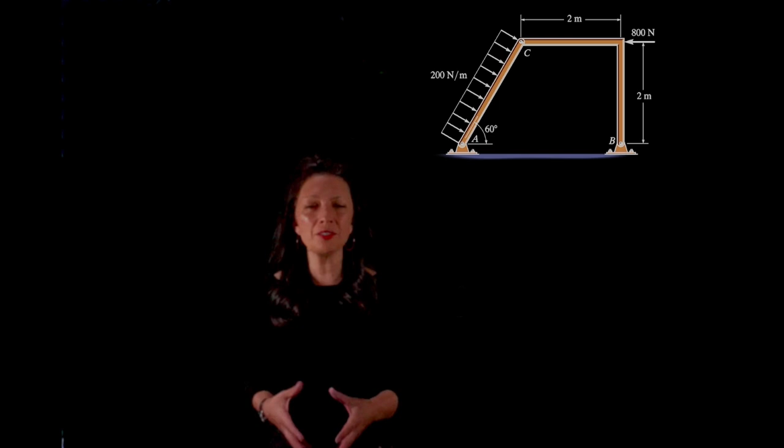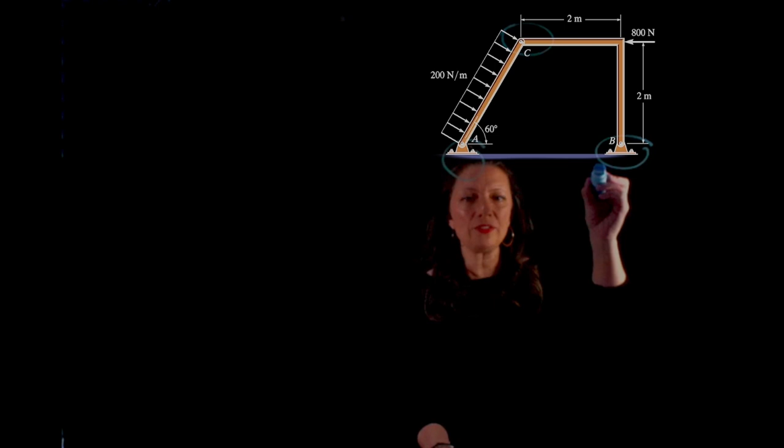And in this question, it actually asks us to determine the force in the pins A, B and C. Okay, so we know that we're going to have X and Y components for each of these. So how do I solve this? I have quite a few unknowns, so if I take a section through this pin, I'm going to end up having member AC, and I'll also have member CB. So I'm going to split this up into two separate problems.

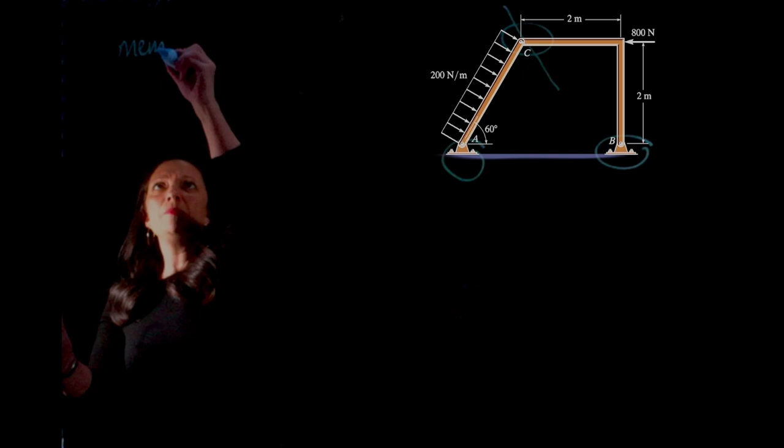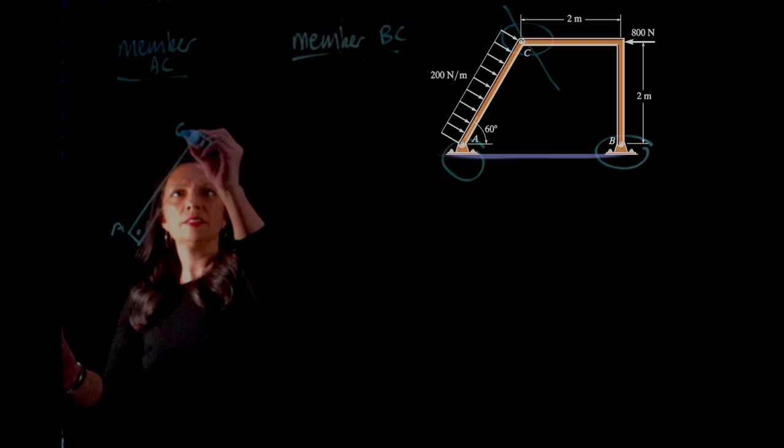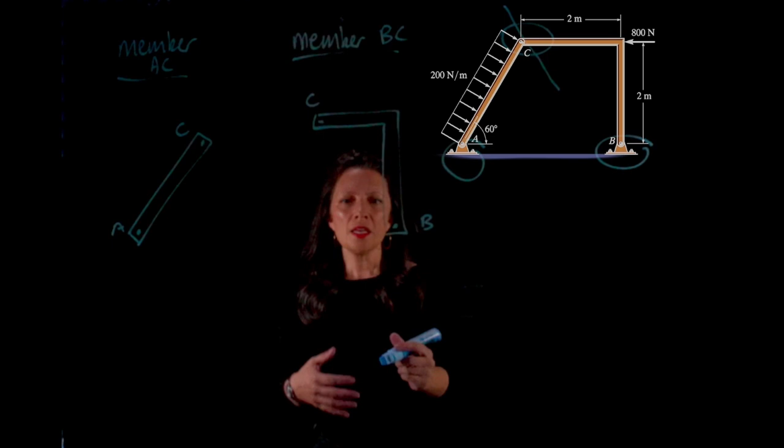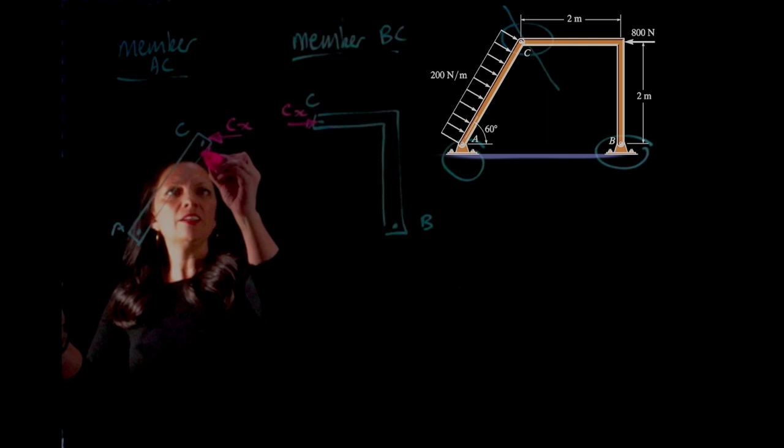So let's take a look here at member AC and member BC. In this one here we have A and C, and over here we have B and C. So when we break the frame into two parts, we need to make sure that everything stays in equilibrium, and these forces are going to be equal and opposite. So here I'm going to have a Cx, which means on this side I'm going to have an equal and opposite Cx, and here I'll have a Cy, and on the other side I'll also have a Cy.

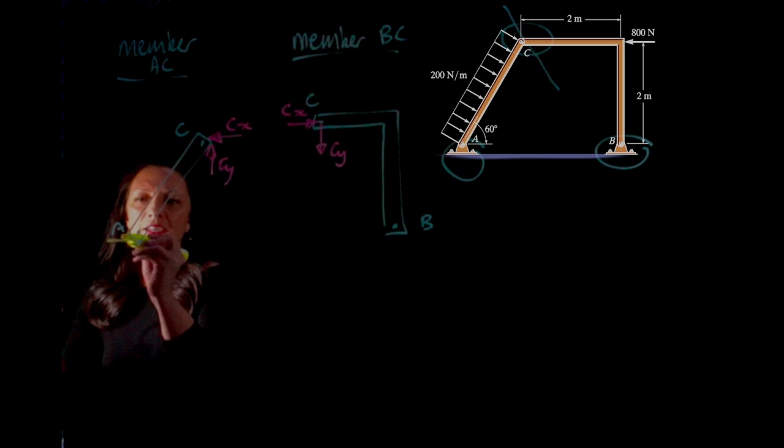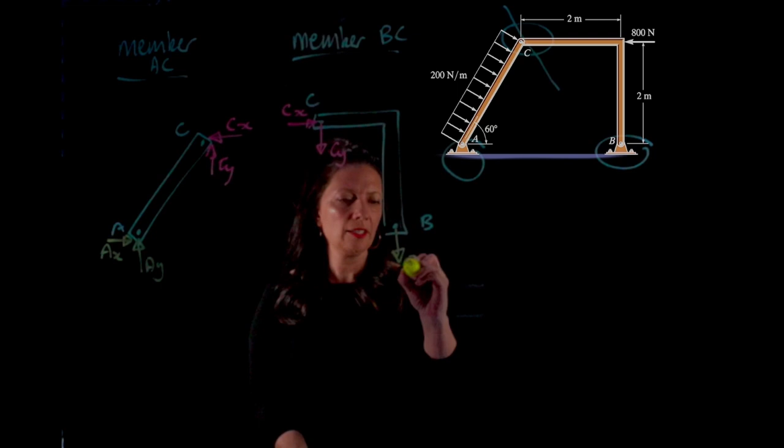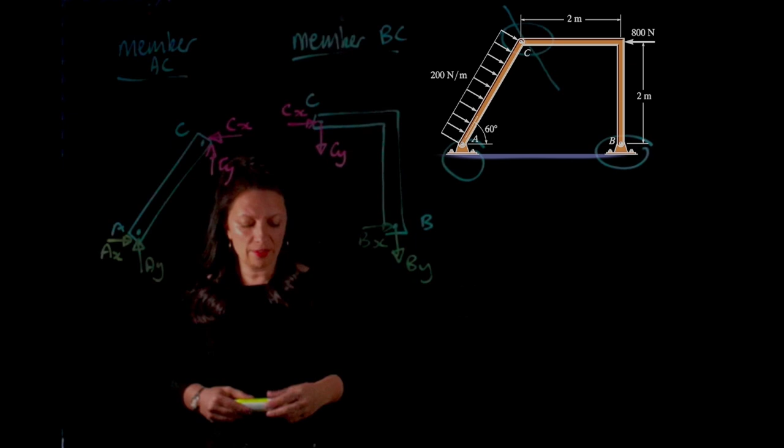Okay, so now what do we need to find? We also have reaction forces at A. So at A I have an Ax and an Ay, and over at B I have a By and a Bx. Okay, let's put on our other forces. So here we have 800 newtons,

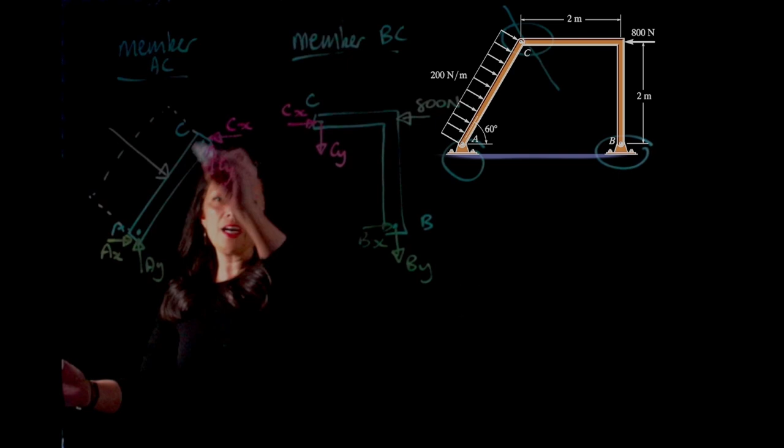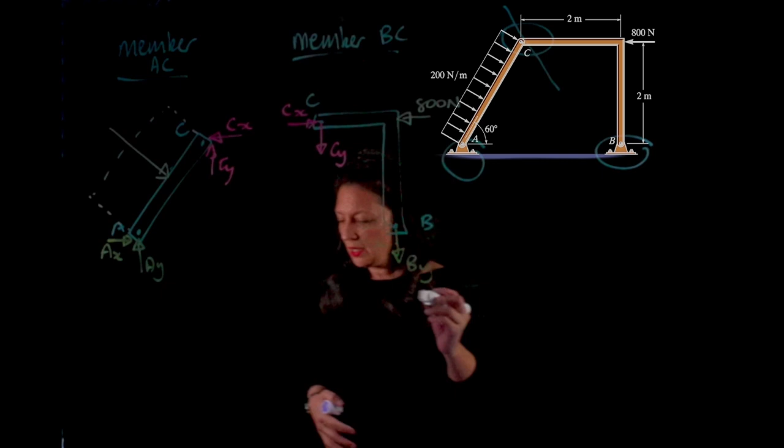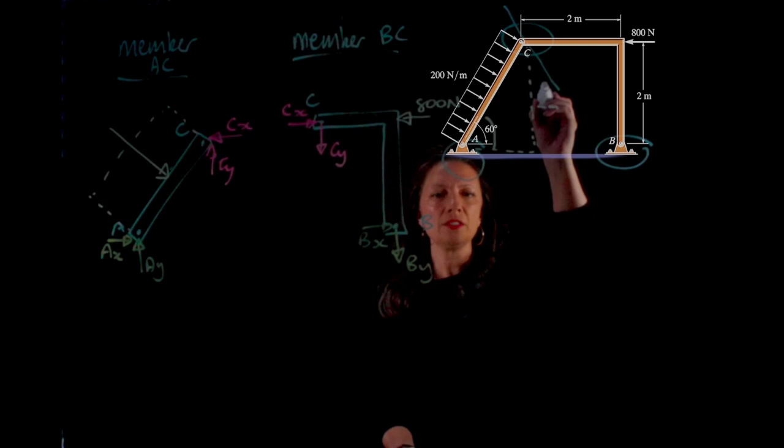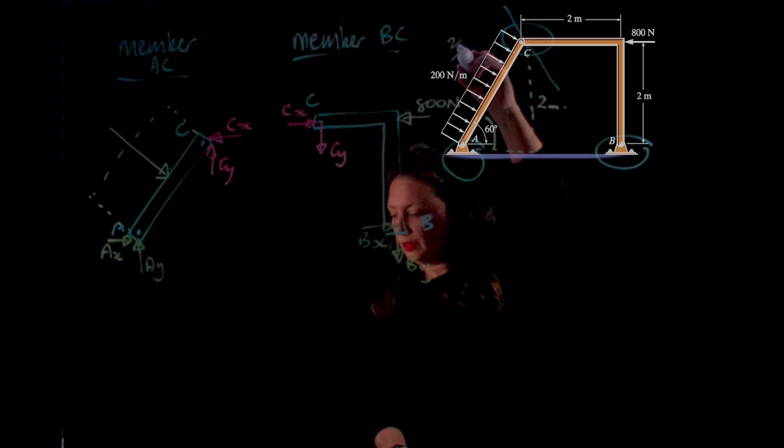and we need to convert this distributed load into a concentrated force. So it's going to be perpendicular, and it's going to sit halfway along this member. So we need to actually calculate what this concentrated force is, and to do that we actually need to get some geometry. So if I just look over here, this is my height of 2 meters. If that's 60 degrees, then this length is going to be opposite on hypotenuse. So it's going to be 2 on sine 60, actually.

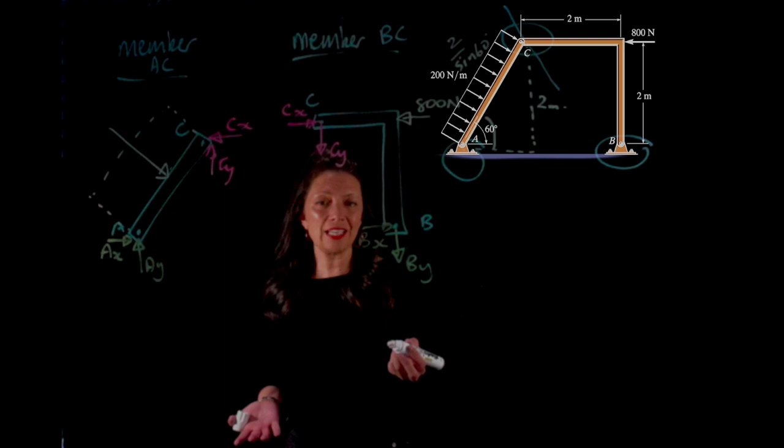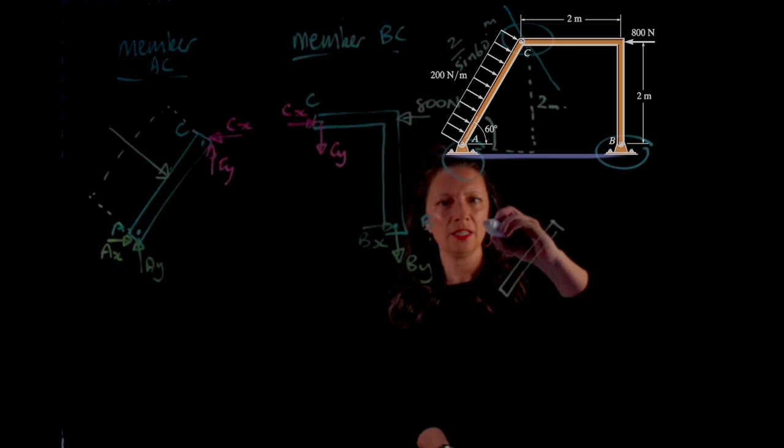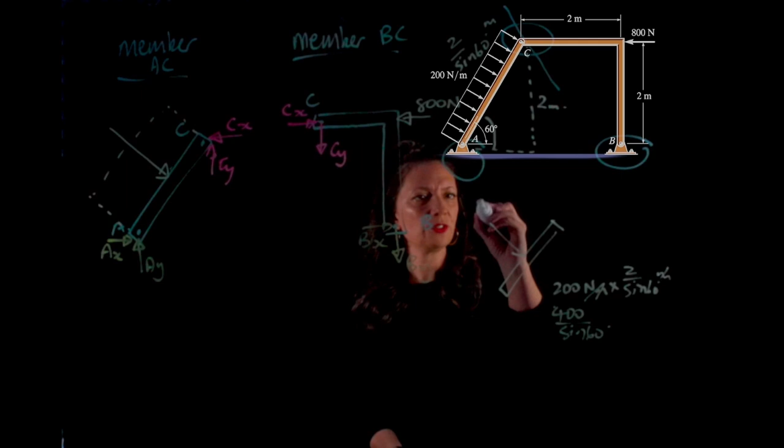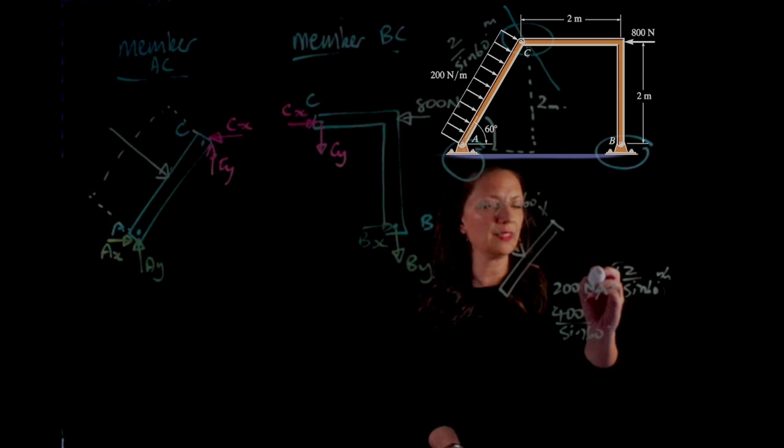So now we can actually calculate what that force is going to be. So if that's in meters, here I have the member, and it's going to be 200 newtons per meter times 2 on sine 60 meters. The meters will cancel out and I'm left with newtons. So it's going to be 400 on sine 60, and that sits halfway through. So if the whole length is 2 on sine 60, that means this distance here is going to be 1 on sine 60. You can actually calculate that out if you like.

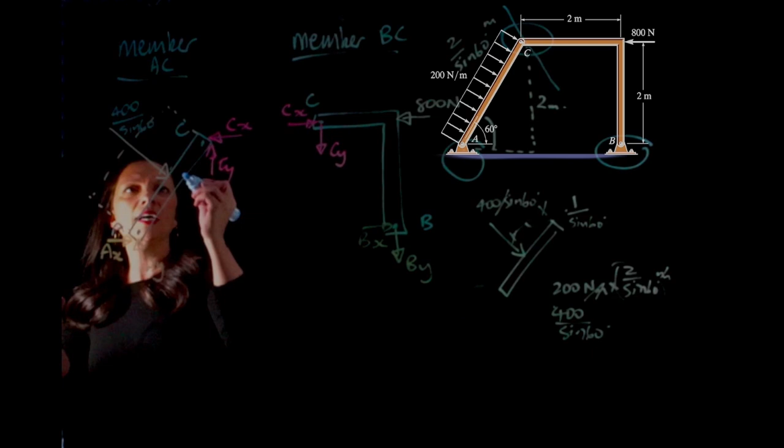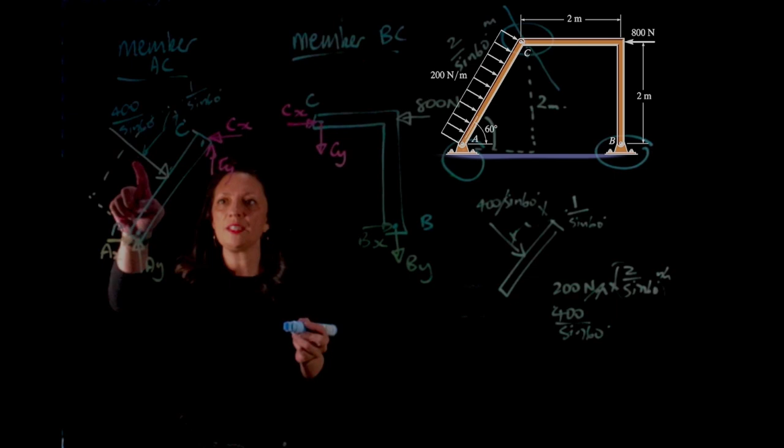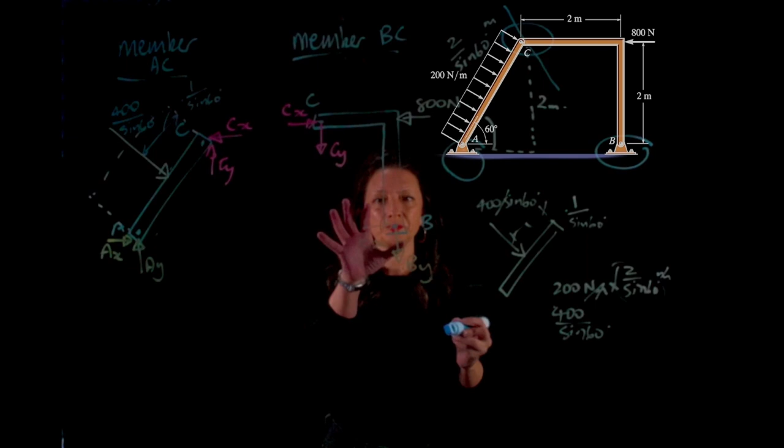So now that we know what this load is, here we have 400 on sine 60, and we have our perpendicular distance, and that is 1 on sine 60. So I can now break this up into its horizontal and vertical components, and once I've done that, I can find the sum of the moments around A and I'll have an expression for Cx and Cy. And then I'll do exactly the same thing in member BC. I'll be able to take the sum of the moments around B and find an expression for Cx and Cy, and then solve the two equations simultaneously.

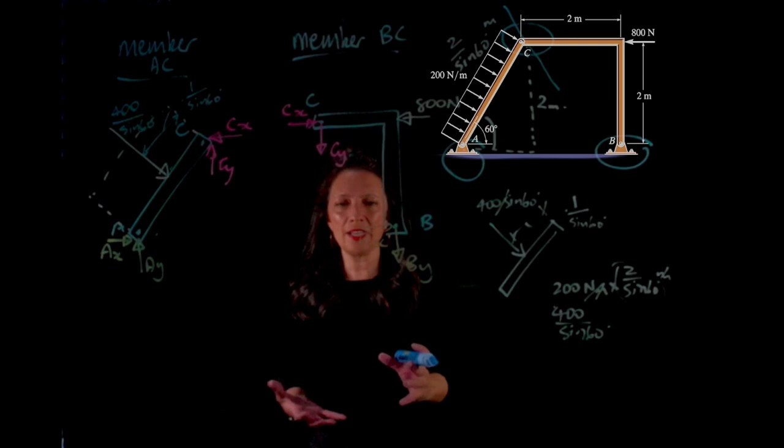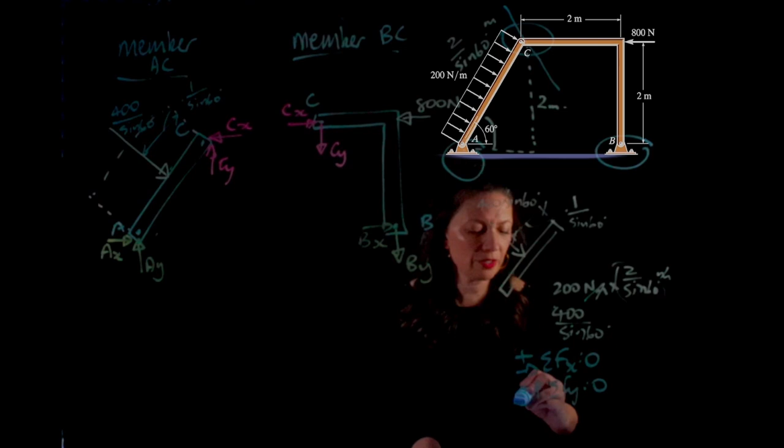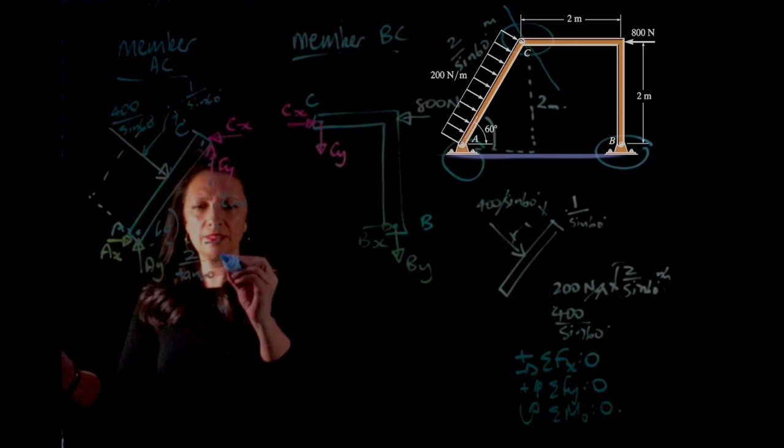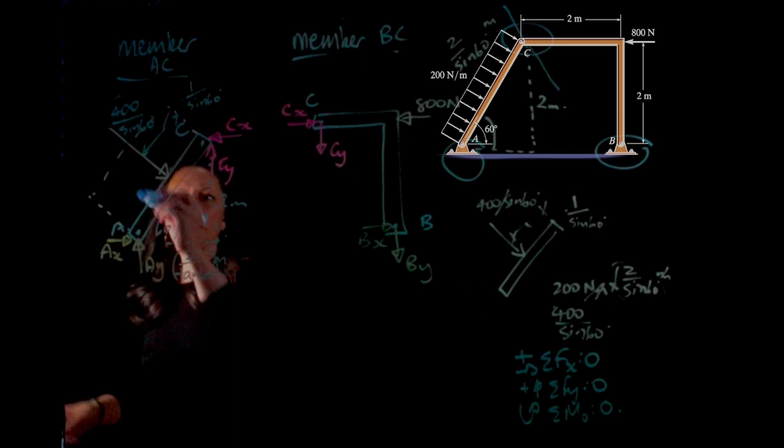And for our equations for equilibrium, the sum of the forces in the x direction equals 0, the sum of the forces in the y direction equals 0, and the sum of the moments around a point has to equal 0. So let's take a look. We've got some geometry going on. That's 2 meters, that's 60 degrees. So this distance here is going to be 2 on tan 60 degrees, meters. And I can actually break this force up into its x and y components. So this angle here is also 60 degrees.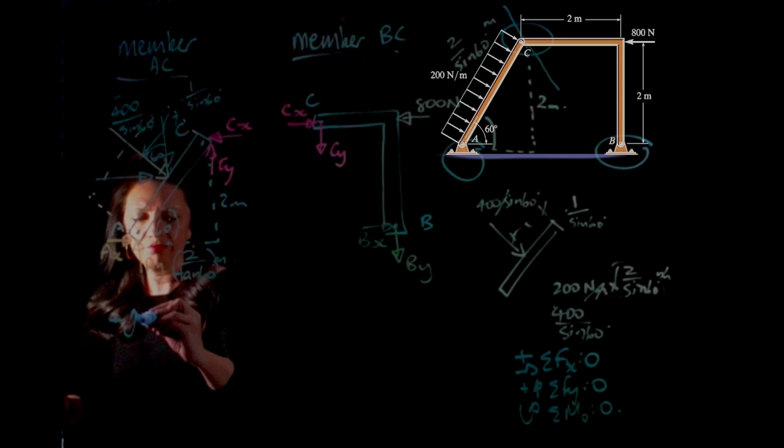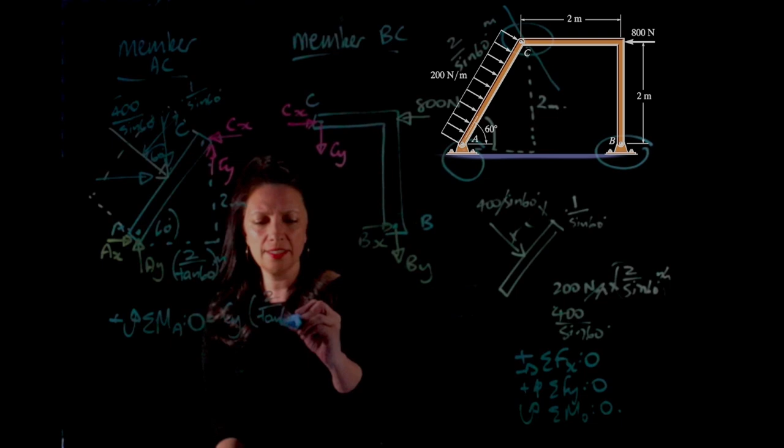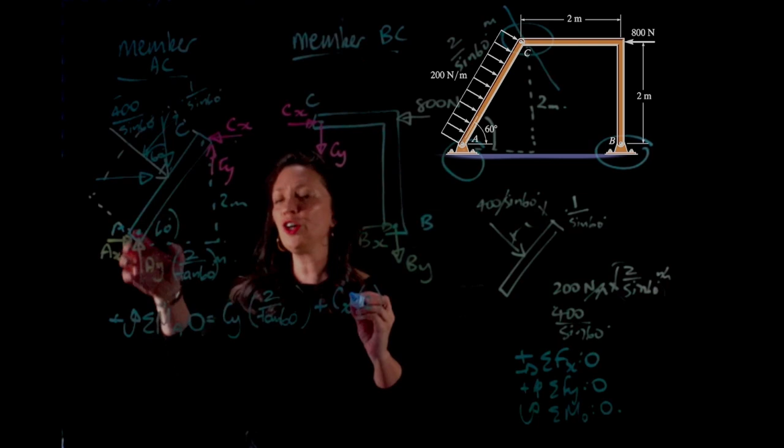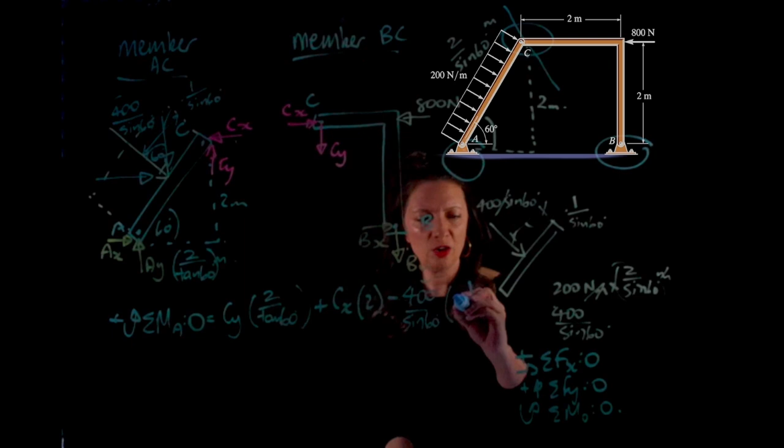So I can say I take the sum of the moments around A, which has to equal 0, and Cy is going in this direction, so it's positive. So Cy times 2 on tan 60, that's my perpendicular distance. I'm also going to have Cx, and that's going positive. For Cx, my perpendicular distance to A is 2 meters. And then I'm going to have the x component of this force, or I can just calculate. I already know what my perpendicular distance is, so I actually don't really need to break it up into its x and y components. Okay, so I'm going to have minus 400 on sine 60, and the perpendicular distance is 1 on sine 60, because we already calculated that perpendicular distance.

So this will be equation 1. If I now take a look at this member, I can take sum of the moments around B, and again find an expression for Cx and Cy. So let's say sum of the moments around B has to equal 0.

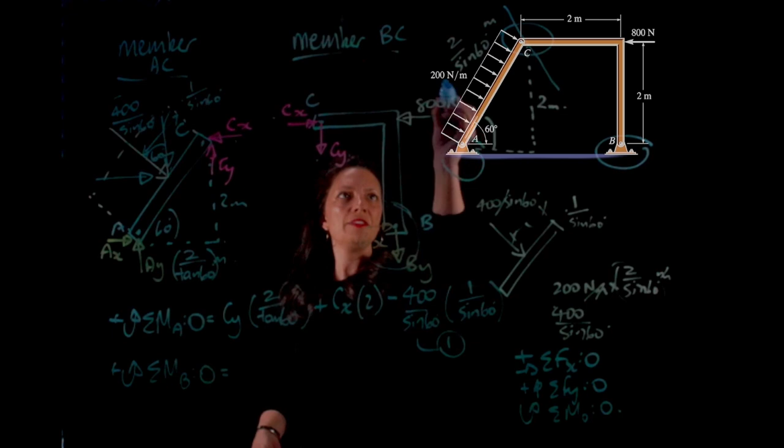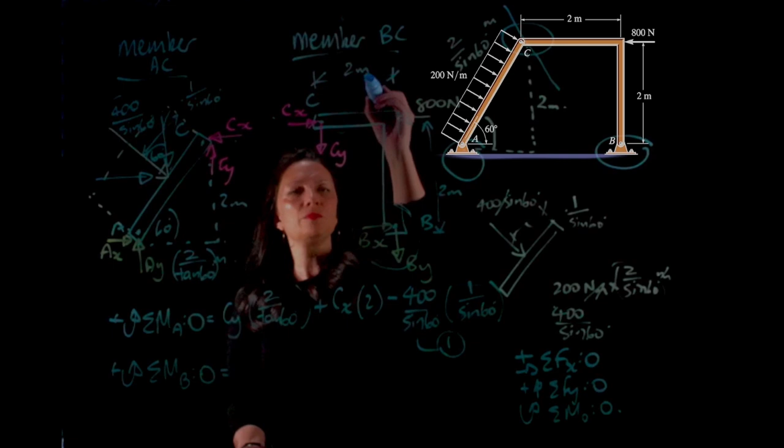And what do I have? I have this 800 newton, and my perpendicular distance is 2 meters. And we also need a distance along here, and that's also 2 meters. So Cy is going to go in the positive direction. So I'm going to have Cy, my perpendicular distance is 2. I'm going to have Cx, that's going negative, and my perpendicular distance also is 2. And then I'm going to have the 800, and that's going positive, so we plus 800, and my perpendicular distance is 2. So if I calculate that out, I can call that equation 2.

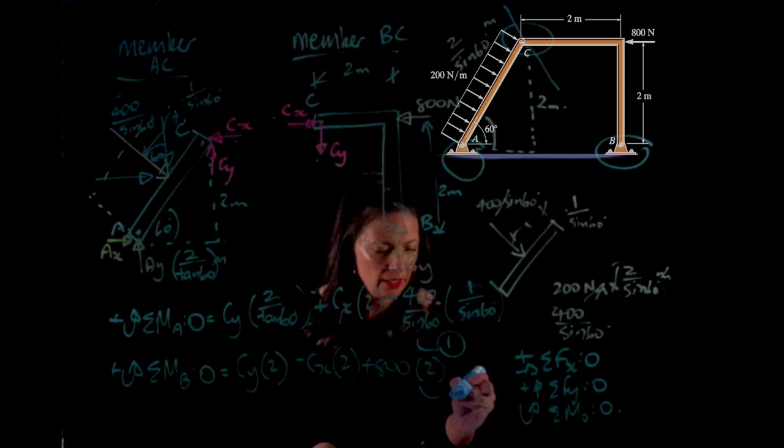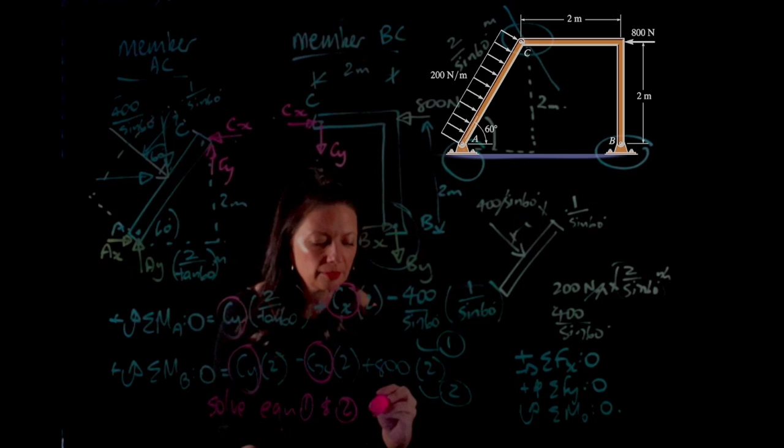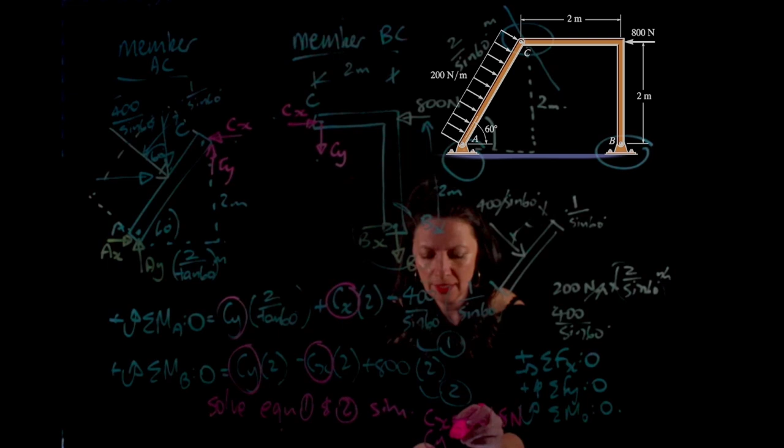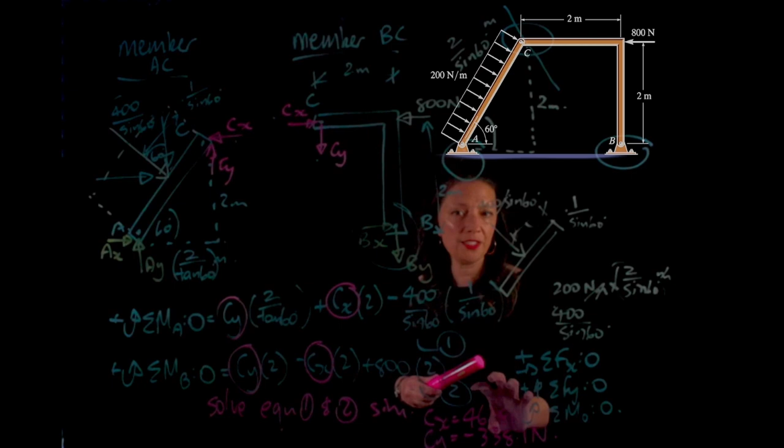So again, I have 2 unknowns in each equation, and I can solve equation 1 and 2 simultaneously, and I should have a value for Cx and Cy. So I've already calculated this, and Cx is going to equal 461.9 newtons, and Cy is going to equal minus 338.1 newtons.

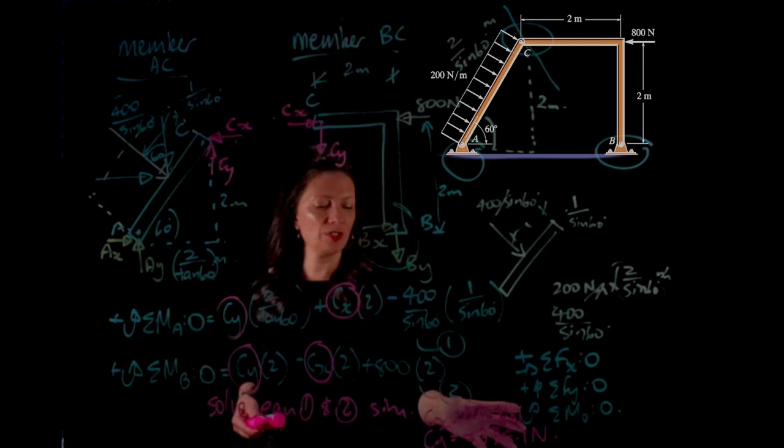Okay, so now I can put these two numbers back into these two free body diagrams, and I should be able to do sum of the forces in the x direction will give me Ax, sum of the forces in the y direction will give me Ay, and similarly on this side, when I substitute the numbers in, I'm going to be able to find sum of the forces in the x and the y direction to give me Bx and By respectively. So let's take a look.

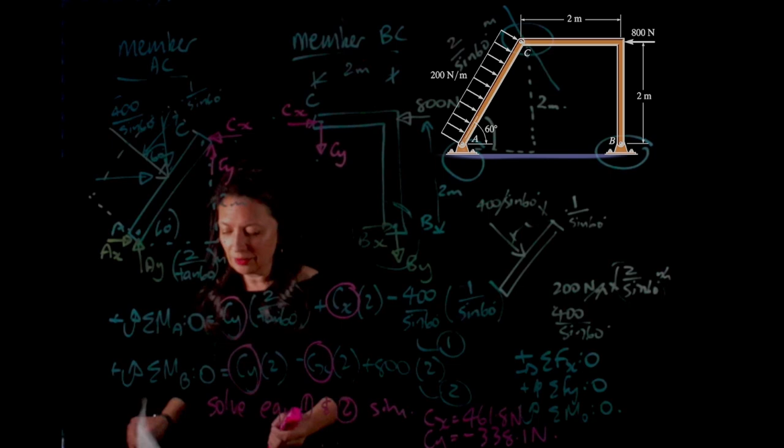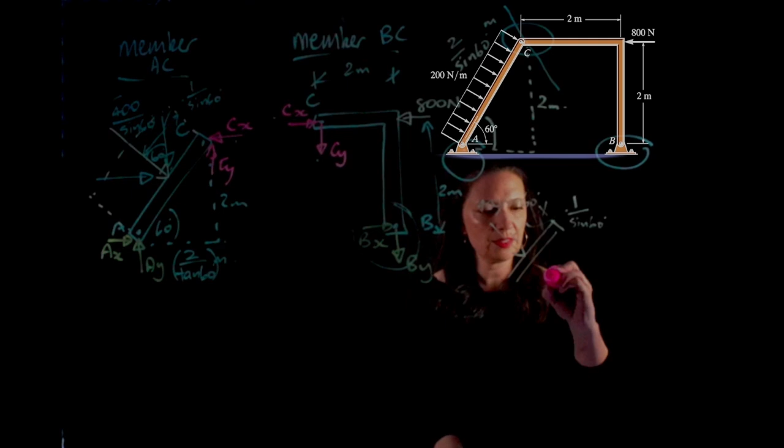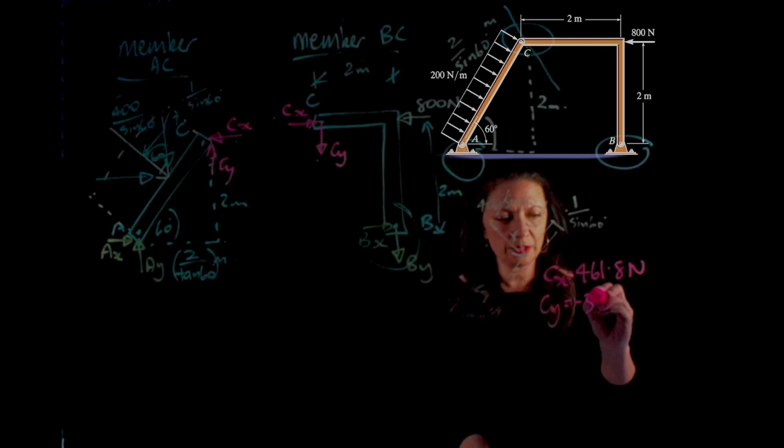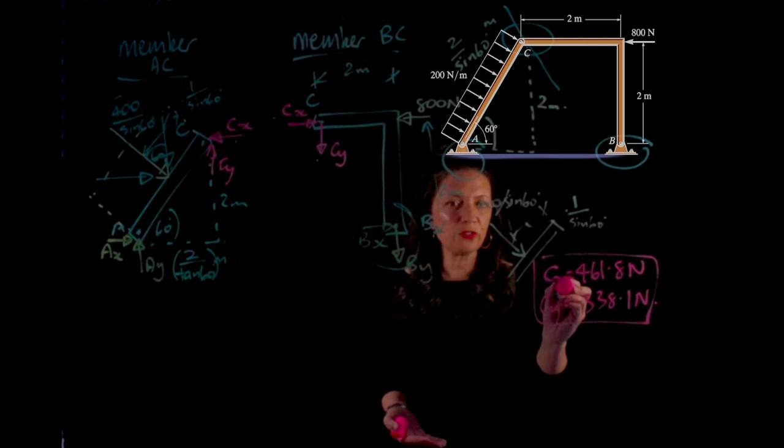So I'm just going to clean this up, don't forget those numbers. I'm just going to write them over here. Cx equals 461.8 newtons, and Cy equals minus 338.1 newtons. So we'll just remember that. So that's also what the question asked me, and it asked me what the reaction forces were at pin C. So there's one of my answers.

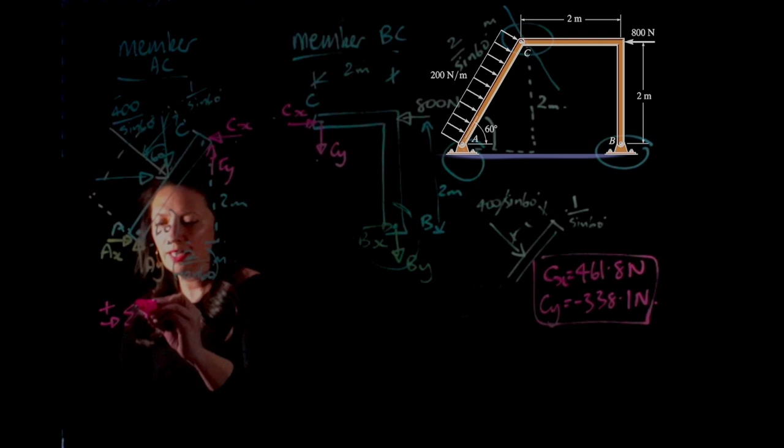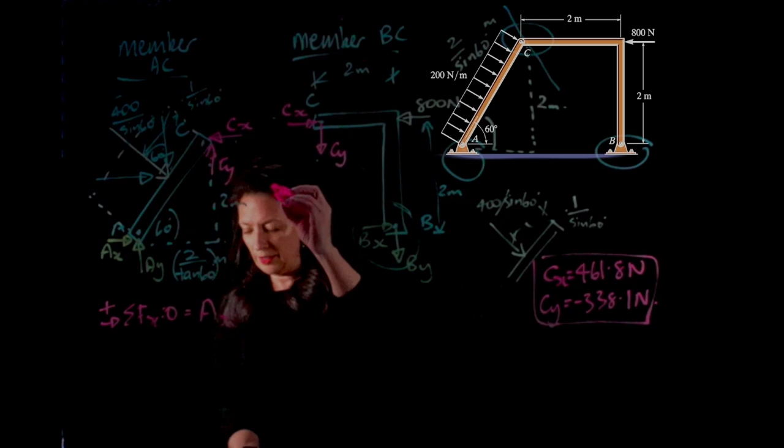So if we look at this member here, if I say sum of the forces in the x direction has to equal 0, what do I have in the x direction? I have Ax, and let's just put an axis in here. I should have written it before, x and y. And I'm going to have this force in the x direction, so that's going to be plus 200, actually I called it 400 on sine 60. And my x component is going to be sine 60. And I'm also going to have minus Cx, I've already calculated Cx. So Ax is going to equal 61.8 newtons. So that's my x component at A.

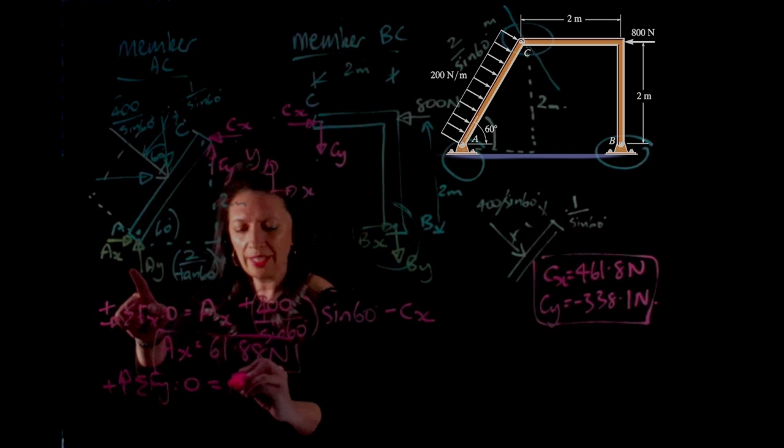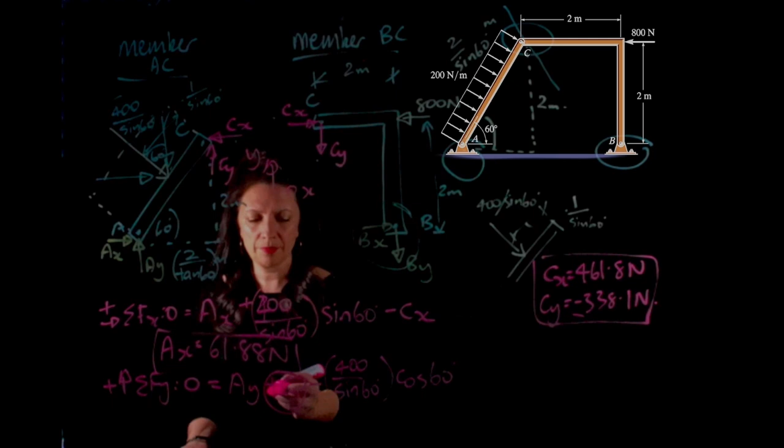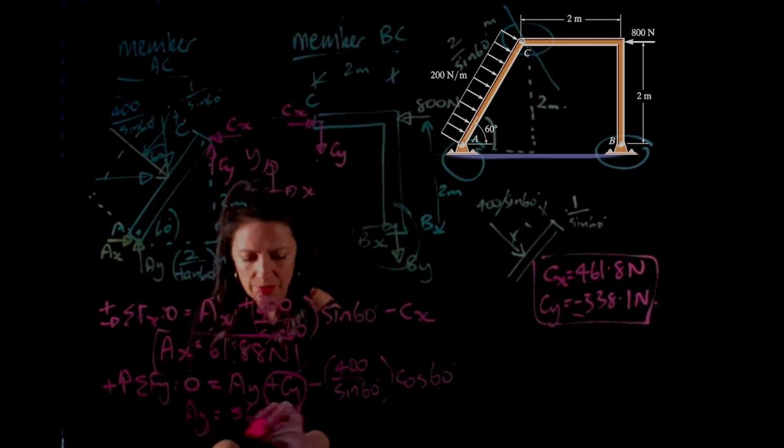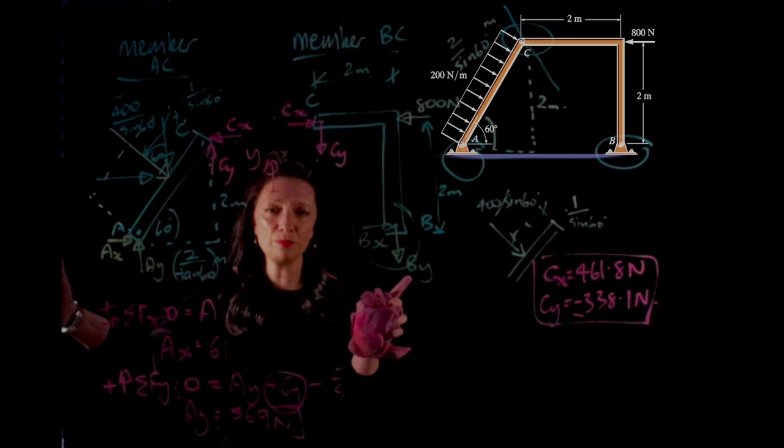Now if I take sum of the forces in the y direction, what am I going to find? Ay. So I can say sum of the forces in the y direction has to equal 0. What do I have in the y direction? I have a positive Ay, I have a positive Cy, and I have the y component of, and that's going negative, of my concentrated force. And that's going to be cos 60. Remember that this is a negative number, yeah? So we need to put the whole negative number into that equation. So then Ay is going to equal 569 newtons. So now I have my reaction forces at Ax and Ay. We're going to do the same thing for this member, and we can find the reaction forces at Bx and By. So it's pretty straightforward once you know how to actually break the problem up into two components.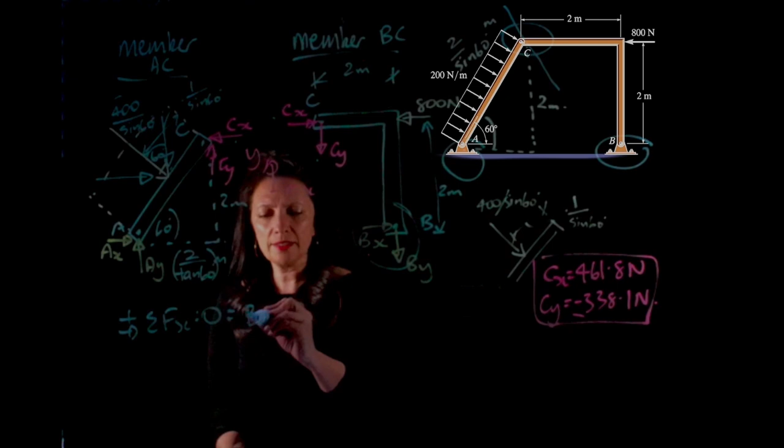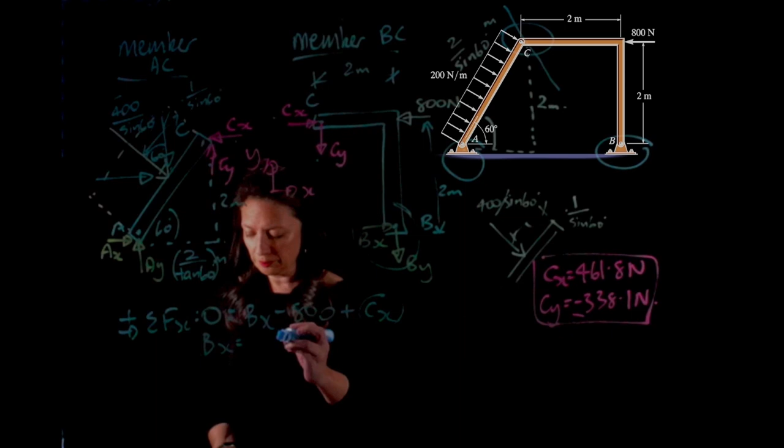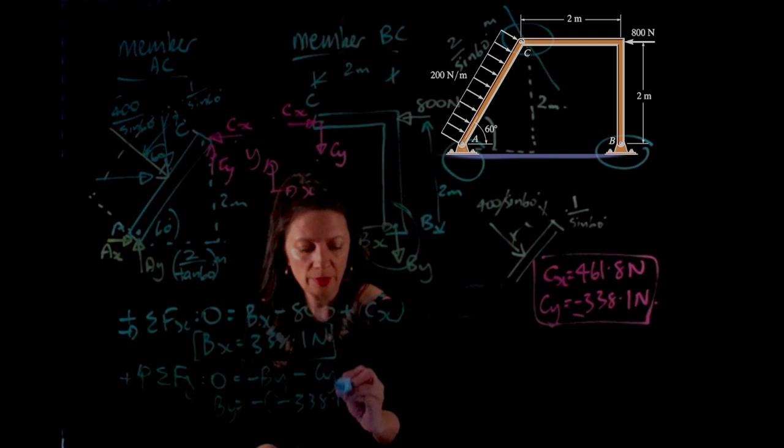Okay, so now let's take a look at this one. So we have sum of the forces in the x direction has to equal 0, and what do we have in the x direction? We have Bx minus 800 plus Cx. You know what Cx is, so Bx is going to equal 338.1 newtons. And then we can say that sum of the forces in the y direction has to equal 0. We have minus By minus Cy. And remember, Cy is already minus, so we're going to have By equals minus minus 338.1 newtons. So By is going to equal 338.1 newtons. So there we have it. We've found our reaction forces at A, B, and at C.

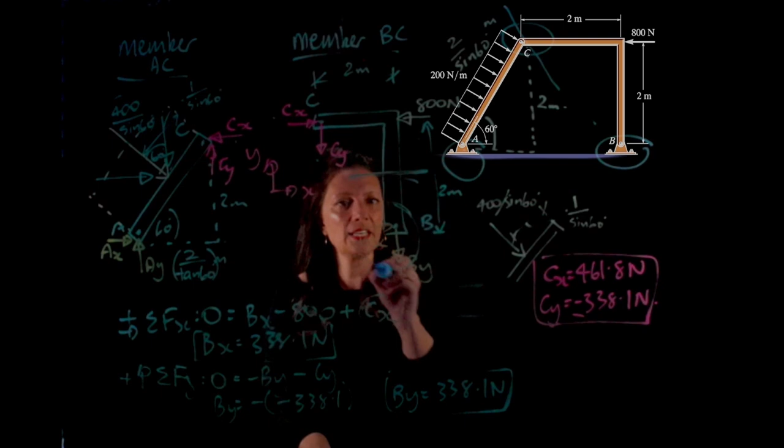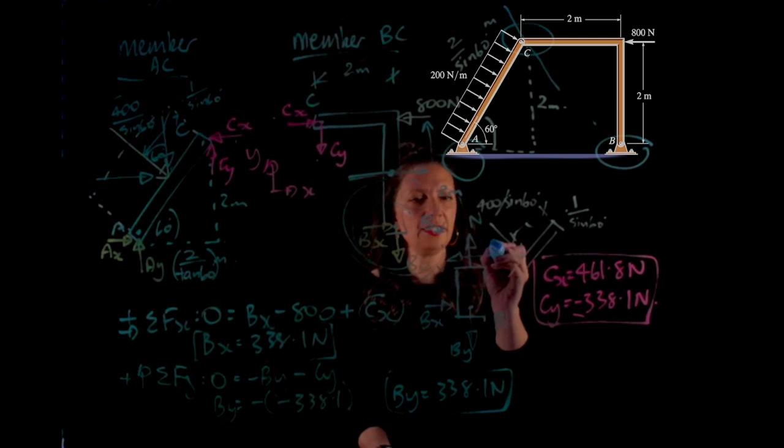If we wanted to take the internal loads and find the internal loads at any point now, that's actually quite simple. If we want to find the internal loads across here, what do we need to do? We can actually just look at this part of the problem, okay? And we should be able to find what the internal loads is at this point, okay? So simply, it's going to look like, so here is B. I've taken my cut here. So here at B, I have an x and a y component, which I've calculated, Bx and By. And I'm going to have a normal force, a shear force, and a moment. And you should be able to calculate that. So I think the most difficult part in these problems is actually knowing where to cut the section, and being aware that you may have to solve a simultaneous equation.